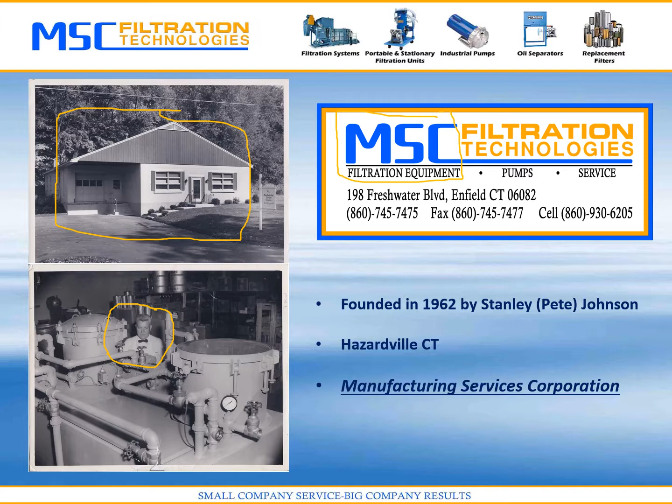Our company was founded in 1962 by Stanley Pete Johnson, and our original office was located in Hazardville, Connecticut. The original name of the company was Manufacturing Services Corporation, and that is what the MSC stands for in MSC Filtration Technologies today.

Today we're located in Enfield, Connecticut in an 8,200 square foot building where we manufacture, warehouse, sell, and engineer our products.

MSC designs, engineers, and manufactures a variety of fluid filtration and handling equipment for a variety of applications and industries. The primary industries we sell to are machine tool, lube and hydraulics, and process industries. Our products reduce waste, improve fluid cleanliness, increase equipment reliability, and improve working conditions.

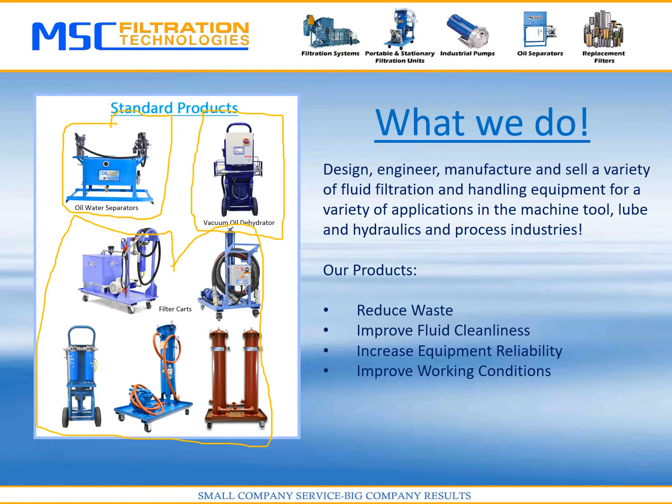On the left, you'll see some of our standard offerings, which include our FilClean line of filter carts, which can be used in a whole host of different industries and applications. Our Tramp oil separator is primarily used in the machine tool industry for removing oil from machine tool coolant. And also our Phoenix membrane vacuum oil dehydrator, which is primarily used in the lubrication and hydraulic market for removing water from contaminated oil systems, is built exclusively by MSC Filtration Technologies.

In addition to our own product lines, MSC also represents and distributes a variety of complementary fluid handling and filtration product lines, including industrial fluid chillers, fluid pumps, vacuum systems, and magnetic filters.

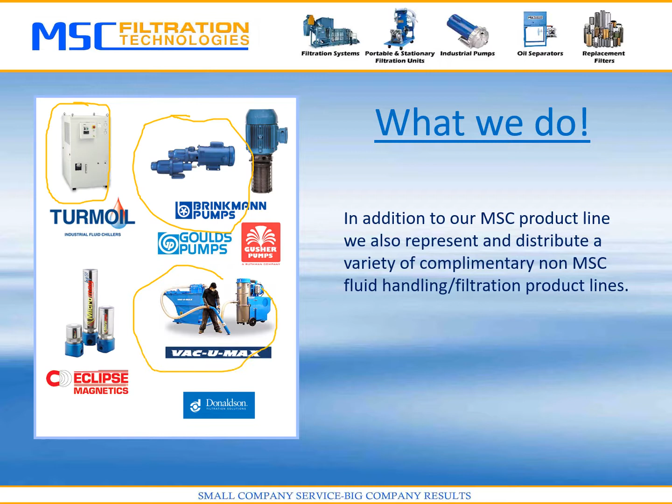With over 50 years of fluid filtration and handling experience, and because we supply and distribute other non-MSC complementary filtration and handling products, we're able to integrate the best product into one single customer-centric solution based on our customer's requirement, budget, and available footprint.

For instance, on the left, you'll see a system which is a centralized coolant filtration system for a machine shop that has multiple machines. The machines are putting out both ferric magnetic particles and also non-magnetic particles, and we have integrated a rotating drum magnetic filter where multiple machines pump their coolant into to remove ferric particles.

The coolant then goes down into a gravity bed filter for non-ferric particles and drops into a storage tank. It is then pumped back out through some fluid pumps that we also represent. So one single filtration machine for our customers versus them having to go out and get multiple different solutions for their problem.

On the bottom, you'll see another system, which is also a coolant filtration system. In this case, the customer required not only coolant that met a certain cleanliness, but also one that maintained a certain temperature. So what we did was integrate a coolant chiller, a drop-in chiller, into a tank along with some disposable filter media and coolant pumps.

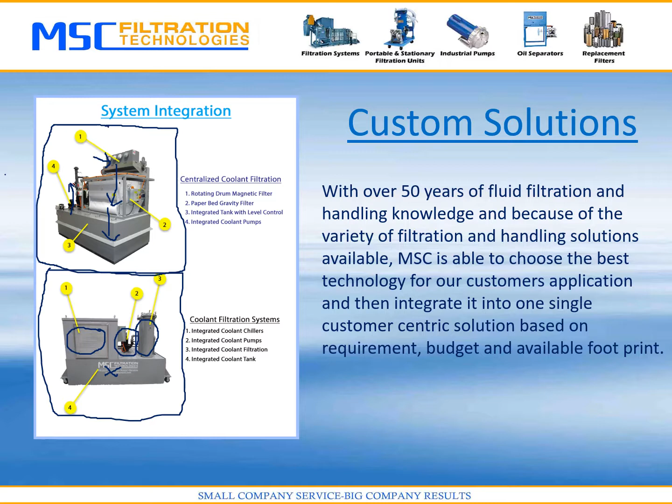This met a specific footprint for the customer where this particular filtration system can be wheeled up to a machining center. The coolant drops into it and then is pumped right back out to their machine for lubricating their tooling and also cooling their parts.

MSC's metalworking solutions are primarily sold to machine shops and machine tool manufacturers. Our primary goal on the machine tool coolant side is to keep their coolant looking like this rather than this.

The reason being is that contaminant that gets into this particular coolant, which can wash off the part or come from chips and particulate due to the machining process, can cause wear and tear on the customer's machine tool, which can be fairly expensive to replace if it breaks.

It can also affect the finish of the part and cause the customer to have to shut their machine down, and when it's not running, it's not making any money, to change coolant prematurely, which can take several hours in some cases. In addition, there's a cost of buying new coolant that might not necessarily need to be replaced if you can keep it clean.

It also affects the work environment because it can start to smell and also can cause dermatological issues for operators of the machines themselves.

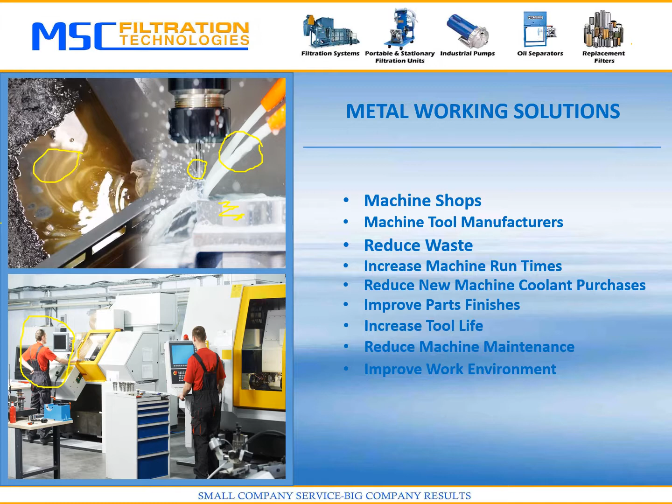MSC has a variety of ways of tackling those kinds of problems, and it basically depends on the machining type, the type of machine, the type of coolant being used. But in some cases, we can extend the life of our customers' coolants indefinitely, and they only need to replace the coolant via makeup because of losses, spills, or drag out from the parts waste.

Here is a map of a machine shop showing most of the products that MSC sells to the metalworking industry, and I'll be covering most of them in this presentation. But there's an excellent map on our website if you are ever interested in taking a look at a machine shop and trying to find the exact product and where it's typically located.

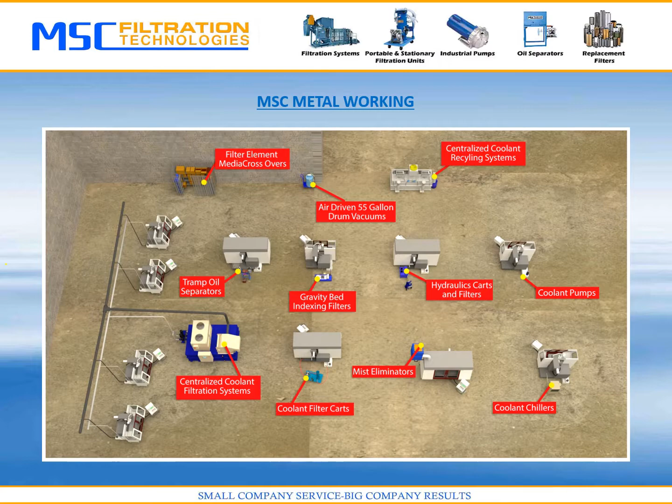So the first MSC product for metalworking solutions I'll talk about is our Tramp oil separator. Tramp oils are oils that coat metal parts. The raw metal comes in with oil on it, and when the water-based coolant is washing over it, that oil can be washed off into the coolant and build up in the whole machine coolant sump. In addition, on some older machines, they can actually have hydraulic leaks, where hydraulic oil can leak into the coolant and also build up.

Either of those types of oils, if they're not separated out of the coolant and removed, they'll build up over time, and they'll cause bacterial growth, foul-smelling odors, and dermatological issues for workers, where if they touch the coolant they can break out. It also causes short coolant life, meaning the customer will need to bring the machine down, and it can take hours to clean the machine out because they need to flush the whole coolant supply system to make sure there's no bacteria or oil left in the system.

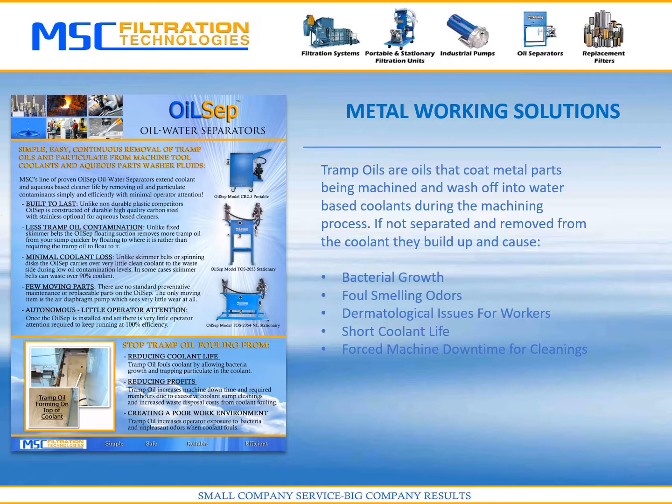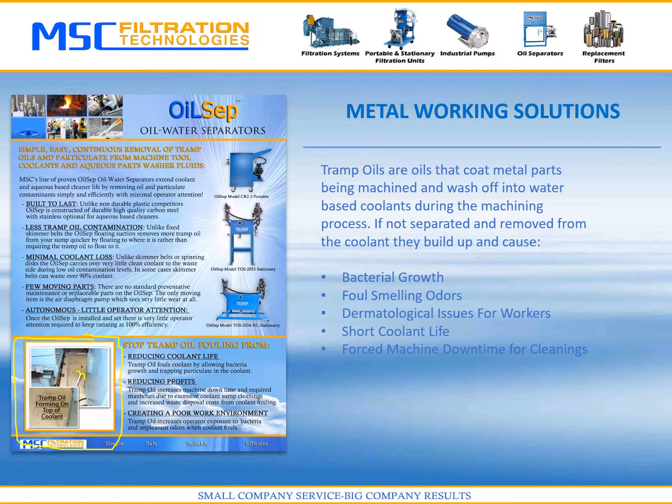So the Tramp oil separator helps prevent that. Over here on the left, you can see some Tramp oil forming on the top of the coolant, this brown material that floats to the top because the coolant is water-based. Tramp oil is oil, and oil floats to the top. That's how we separate it out and remove it from the coolant.

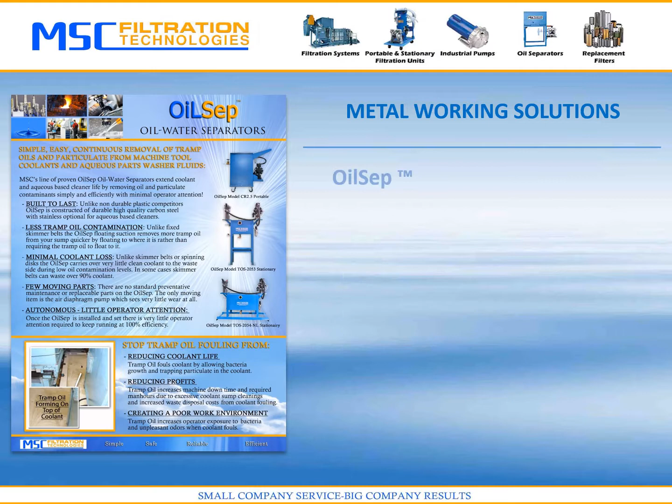Now, the oil sep has been around for a while. MSC has been building them for a long time and has thousands of these in the field. It's very simple to use, has very few moving parts, very few consumables, and very high quality, durable construction. There are more inexpensive plastic versions of these on the market, but they are not nearly as durable as the oil sep that we make.

And it works significantly better than oil skimmers for a variety of reasons. We have a very good video online on our website that will review the benefits of our technology versus the standard technology that's on the market today.

It has very little coolant carryover, meaning there's very little coolant waste associated with this. The customer throws out 90 to 95% Tramp oil, and the coolant remains on the machine. It's available in permanent installations and also portable models where it can be moved from machine to machine to remove Tramp oil that's built up. The process of separating out the Tramp oil is also very easy on the coolant—it does not affect the chemistry of the coolant at all. So you can run these indefinitely and not worry about stripping out any additives that might be in the coolant, like you might with a centrifuge or something else.

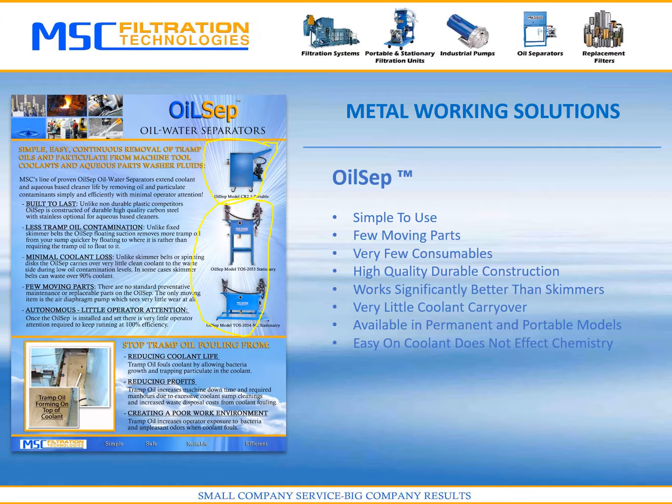So here is actually how the Tramp oil separator works. What you're looking at here is a coolant sump, a machine sump, and you can see Tramp oil starting to form on the top of the coolant. If that's left to go, it will build up a very thick layer on top of the coolant, and again start to smell and cause problems for the machine.

So we have a floating suction on the Tramp oil that has floats on it, and we pull the coolant into this floating suction into our Tramp oil separator. We're only removing the top 1 inch of coolant from the machine tool sump. The coolant is pumped into the Tramp oil separator and goes through three different stages, three different sections.

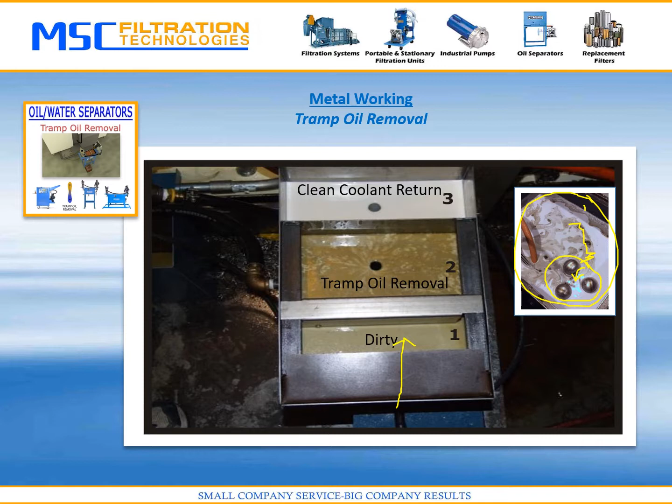Here is your dirty section, where you can see basically a blend of Tramp oil and coolant coming into our system. Then you have the separation stage, where Tramp oil is being separated out of the coolant. It floats to the top of the coolant and drops over a drain for disposal. This will actually drop off, and the customer can open that drain up and drain off the Tramp oil occasionally into a bucket or collection vessel so they can dispose of it.

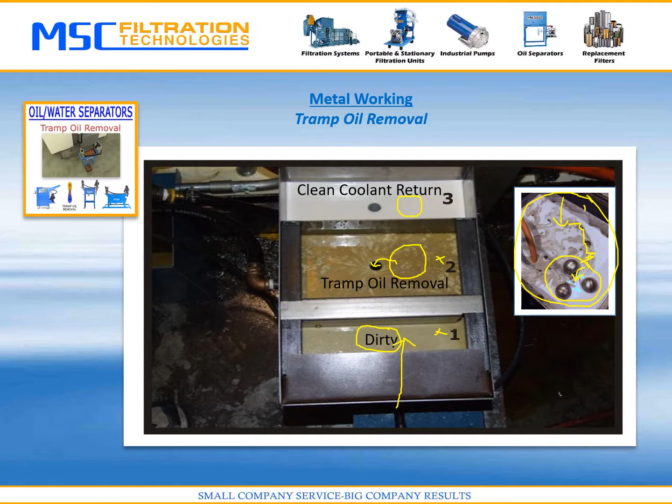And then over here is the clean coolant return side, which continually gravity feeds back to the coolant sump in a gravity fed sort of way. You can see the effectiveness of the Tramp oil separator here, where you see the dirty side, the separation side, and how clean it actually is returning back to the sump.

Here's a better picture of the Tramp oil separator and how it's typically installed and used. Over on the left, you'll see the floating suction, with Tramp oil forming on top of the coolant. The benefit of our technology is that we're continually drawing any Tramp oil that forms on top of the coolant toward that sump or suction, because it's pulling off the top 1 inch of coolant all the time.

So we don't allow any Tramp oil to really form in this sump, since it's continually being brought to the floating suction and pumped into our Tramp oil separator. Unlike, for instance, a skimmer, which sits in just one spot of the sump, where the Tramp oil has to basically float to it to get removed, so you can get a buildup of a lot of Tramp oil before it's actually removed.

In our case, we're actually pumping the Tramp oil into our system. It will go through either a fairly inexpensive disposable filter, or in this case a strainer basket to protect our pump from any chips that might get in, then through an air diaphragm pump and into our system. The air diaphragm pump has a flow control valve, and our system comes with everything needed for hookup, including air regulator, air filter, and air flow control valve for the pump.

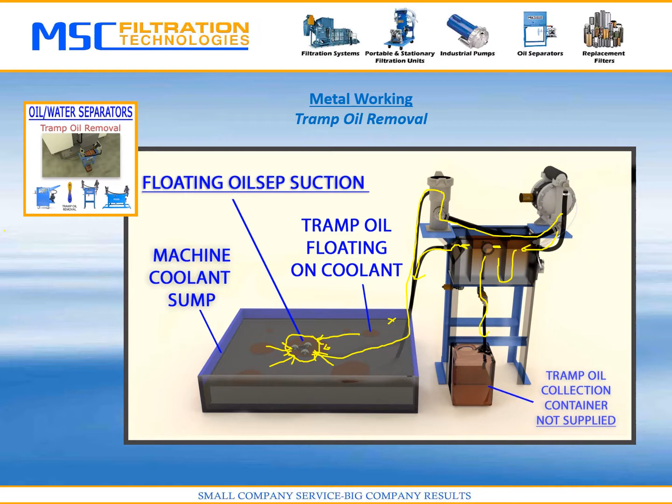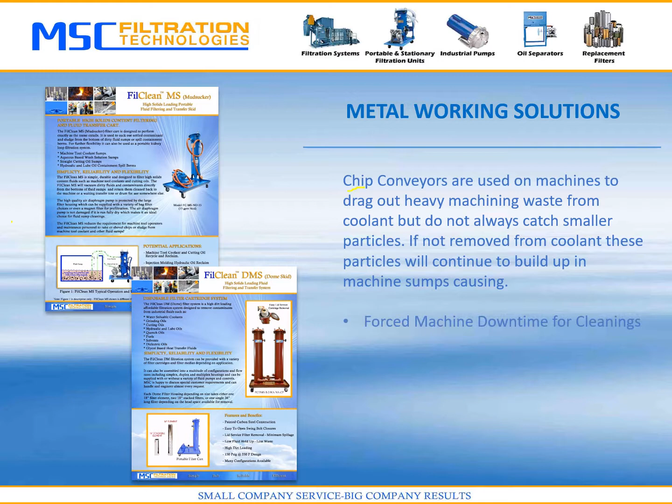The next product I'll talk about is our FilClean line of filter carts for the metalworking industry. In most cases, most machine shops have a chip conveyor that sits under the machine, where coolant and chips from the machining process fall, and the chip conveyor drags out that waste before the coolant is reintroduced down into the sump of the machine for reuse, to be pumped back out and reused in the machining process.

What happens though in a lot of cases is chip conveyors don't catch all the particulate that the machining process generates, and you end up with smaller particles of machining waste and chips falling back into the sump. Since it's continually kidney looped around the machine tool, those will eventually build up in the sump and in the coolant, which can cause a whole host of problems, from pump failures to pump clogging to poor parts finishes. As these particulates build up in the coolant, they can actually start to affect the parts finish, including shortened machine tool life.

The machine tools could potentially overheat and break because that can cause friction, and also shortened coolant life, where you get into the same situation as Tramp oil, where you have to take the machine down to throw away your coolant, buy new coolant, and clean the whole system out, which takes time.

So MSC builds a couple of different filter carts for different machining applications. One is the FilClean MS Mudsucker, which tends to be used on heavier machining applications and chips, in a lot of cases for instance aluminum, which can build up in a machine tool sump and both float and sink. What this does is you put the suction and return of this into the machine sump, and it'll stir all that contaminant up and filter it out so the coolant stays clean.

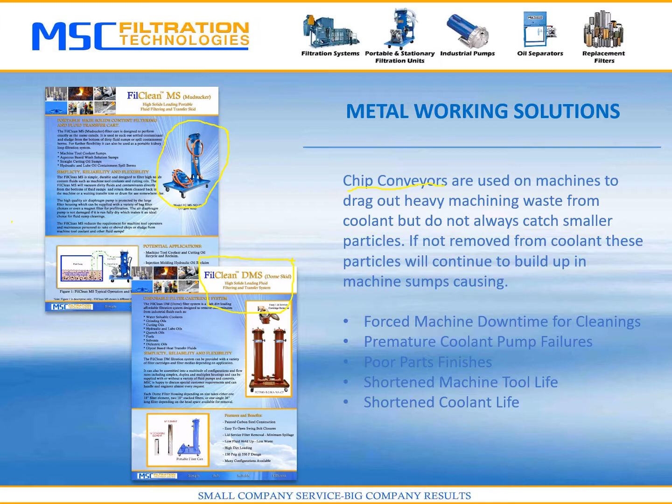The other filter cart system we make is our FilClean Dome, or DMS skid, which is primarily made for grinding applications. It works very similarly, where you would put the suction and return hose into the sump of the machine, but grinding applications tend to produce much finer particles than heavy machining applications. In this case, we use our Dome cartridge filters, where we pump the oil through these cartridges to keep the machine tool coolant clean.

Over time, aluminum can tend to float on top of the coolant, and it also sinks to the bottom of the sumps. Because of that, as it builds up, it can start to cause problems with coolant pumps because they can start to plug, or the coolant distribution can start to plug hoses, and also again start to affect the parts finish of the machining process.

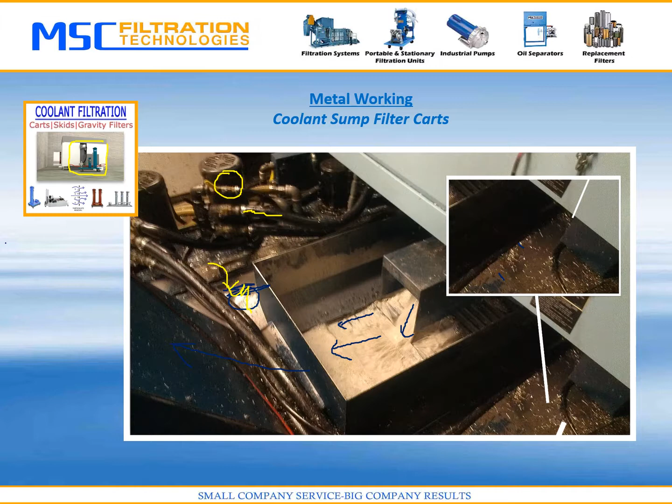That is what the FilClean MS Mudsucker and the FilClean Dome are, except the Dome does that primarily for grinding applications versus machining applications.

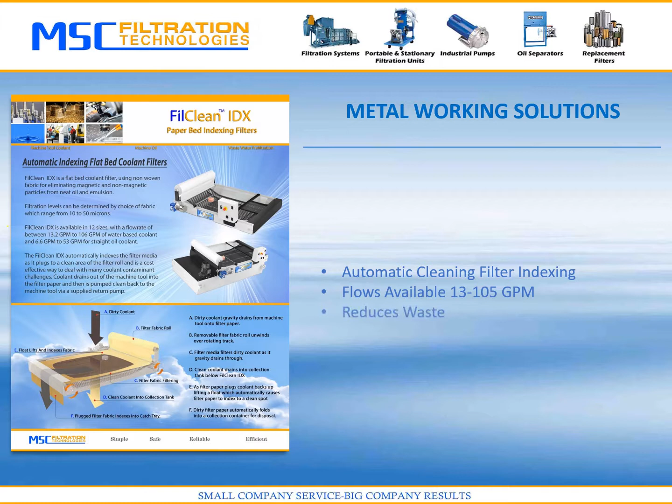The next product I'll talk about is our FilClean IDX, which is a gravity-fed indexing filter. This would be used on a machining process primarily where there are a lot of contaminants, and disposable filtration isn't really an option.

The way these work is you have a roll of filter media here, and the coolant gravity feeds out of the machine into the IDX. As it goes down across the filter media, your particulate builds up, and as it builds up on this filter media, your coolant starts to back up as it gets restricted.

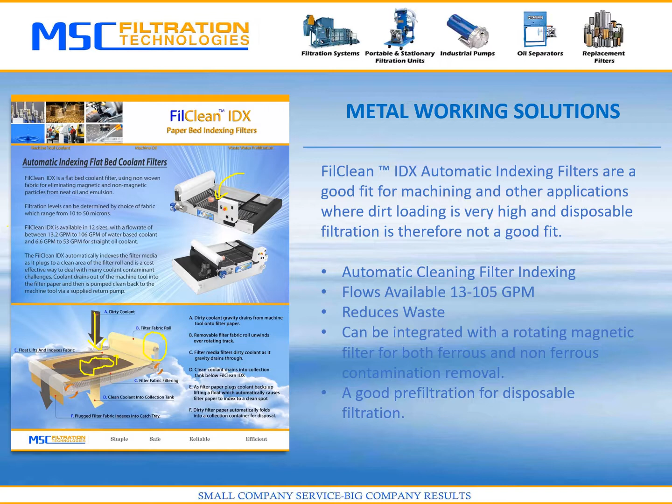When it backs up, there's a float or some electrical probes that the coolant will contact and lift. When it does, your roll media will then index off the machine into a container, to a clean spot, and it will just continue to do that.

The benefits of this technology, which has been around a while, is that roll media is very inexpensive, and you end up with an automatic compressed pack of filter media and machined waste that is in a sump that's easy to dispose of.

This can be used on both grinding and regular machine applications, basically set next to a coolant sump with the material sent back to the sump. Flows are available 13 to 105 gallons per minute, and it significantly reduces waste.

We can also install a rotating magnetic filter. It's not actually shown here, but the coolant comes in and goes through a rotating drum magnetic filter to remove iron particles first, and that comes out as a dry cake.

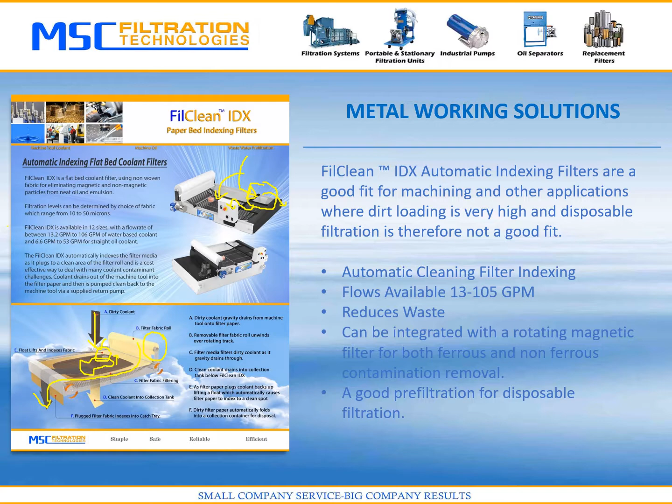Then the regular coolant goes down into the paper bed filter for final polishing. So it can be incorporated with a grinder, a magnetic filter, and a paper bed filter, and is very economical to operate once it's installed.

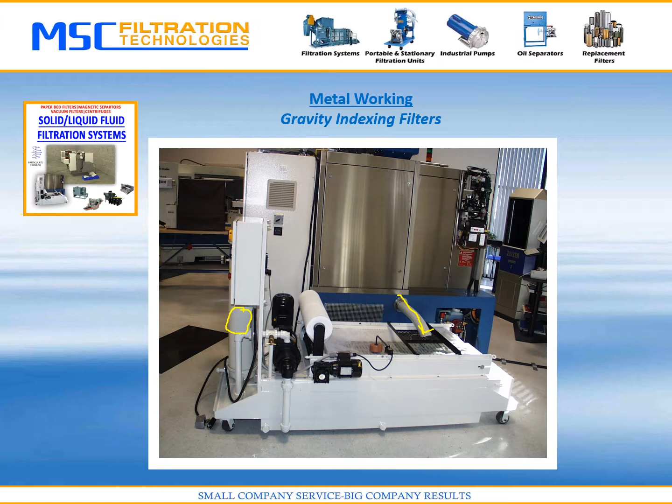And the next product is our FilClean CR Coolant Recycling line. We are able to actually, with our coolant recyclers, in many cases, extend the life of our customers' coolants indefinitely.

The way we work with our customers as far as recycling their coolant so that it can be reused indefinitely is we partner with them. It's not just a matter of selling equipment. It's also working with them to maintain correct chemistry while they're recycling and taking care of their coolant correctly. So we tend to think of this as a partnership between us, the management at the facility that wants to recycle, and also the customer's coolant supplier, who would all need to be involved for a good, effective recycling program.

We make both a 3-tank recycler design, which could handle up to about 1,200 gallons of coolant per day, and for smaller shops, a smaller 2-tank recycler.

There's an excellent video on our website about the whole recycling process, how it works, what we recommend. That is excellent for anybody who wants to learn about the process. It's about 13 minutes long, but it's fairly in depth as to how the whole process works.

In the right situation, it's got a very amazing return on investment, in some cases 6 months. It's not very difficult to do, so it's a fairly simple operation. And again, it provides all the same benefits of keeping your coolant clean, reduced machine tool downtime, reduced environmental footprint, increased tool life, improved parts finishes, and of course improved work environment. So there are a lot of benefits to recycling coolant on site.

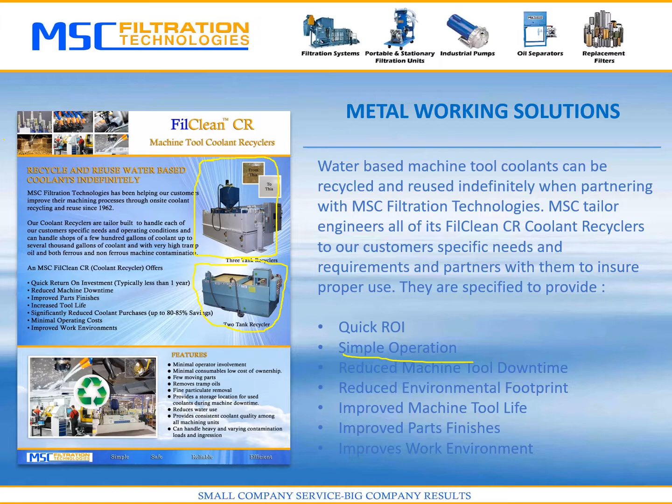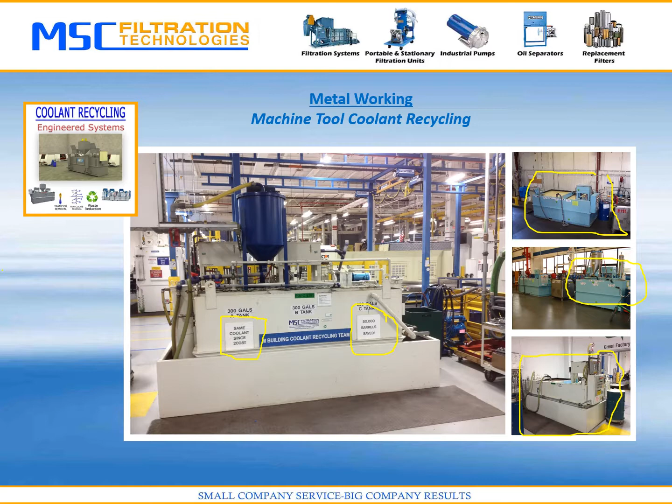You'll see our 2-tank recyclers, 3-tank recyclers here, and also another 2-tank recycler in the smaller shop. Again, we have a very good video online to go over the whole process, which I would recommend you take a look at if you're interested in learning more about recycling itself.

So the last area I wanted to discuss regarding our metalworking solutions, coolant filtration and handling products, is our custom coolant filtration and handling systems, which I discussed a little bit earlier on in this presentation. These systems are designed around what our customers' material are being machined, number of machines they have that they want to filter, contaminant size and type, the amount of coolant they are actually using, the coolant type, and also the machining type. Are they machining heavy material, or are they doing some sort of grinding?

And what we're able to do again is integrate several technologies into one solution for the coolant filtration and handling application. For instance, up top here, what you see is a centralized coolant filtration system for grinding applications, where there are actually 6 different grinders in this machine shop. Each one of them will pump their coolant into this machine across a rotating drum magnetic filter to remove grinding fines from the coolant.

So what happens is the coolant from each grinding machine is pumped down across this rotating drum magnetic filter that indexes. The ferric particles are attached to the drum, and as it rotates, the material builds up a cake and is scraped off and drops down into containers for disposal or recycling. Then in the back are coolant pumps that will return the coolant to each machine. So this does everything, filtering and pumping the coolant to each specific machine.

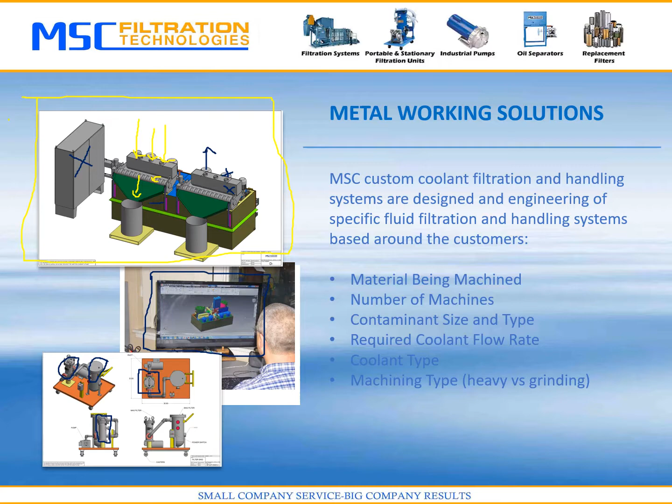So here are a couple of systems in our custom coolant filtration area. When I talk about custom coolant filtration, it can be one single filtration system for a specific machine tool, or a centralized system for multiple machines, like up here in this photo, where you've got multiple machining centers all feeding into one pipe that sends their coolant over into our machine.

The material is filtered and chilled to a certain temperature and then pumped back to each machine through a separate pipe header that you see up here. So in many cases, we can design an entire filtration system for one machine shop or multiple machines, or a single filtration system for one specific machine that might be having some issues.

Here's an example of the system I discussed, where you've got a large gravity bed filter that the coolant from each machining center is gravity fed down into. It goes through the paper filtration media. When this filter media is plugged, it automatically indexes out into a container for waste disposal. The coolant then gravity feeds down into this tank and is chilled to a certain temperature by this particular drop-in chiller, then pumped back out into the machining centers in a continuous manner.

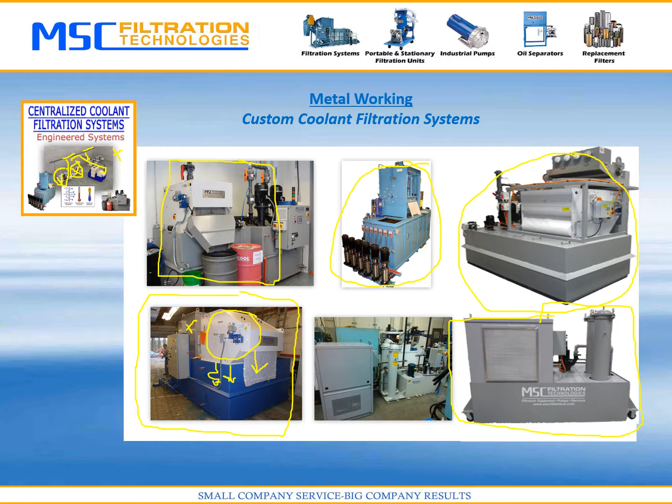Here's the single machine system for the specific grinding machine I talked about earlier. And here's another system we designed specifically for a machine tool application to keep their particular coolant clean.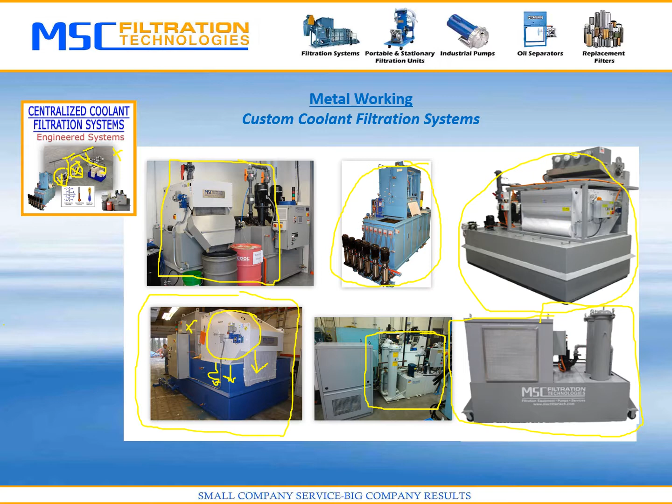So if you don't see exactly what you're looking for on our website, you can just ask the customer what they're trying to achieve, and in most cases we can come up with a solution for them.

Now I'll get into our lubrication and hydraulic solutions, which cover a whole variety of different industries. We've sold to paper, power, chemical, mining, marine, on and offshore oil rigs, refineries, and road machinery. The primary focus is filtration and keeping lubrication, hydraulic systems, and gearboxes reliable by keeping their lubrication clean. The cleaner you keep lubrication, the longer you'll keep your bearings, gears, and hydraulic systems from failing, and that's our main goal here.

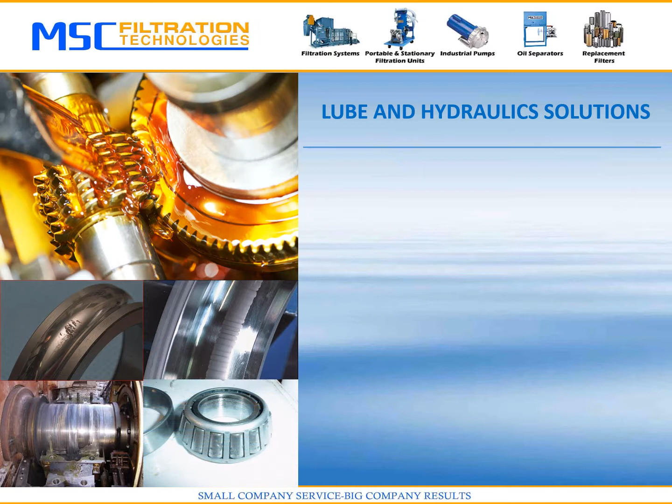Over here on the left, you'll see some damage caused by lubricating oil—here's a bearing that has been damaged by particulate over time. We have a pretty good video online called Water and Particulate in Lubrication and Hydraulic Oil, What's All the Fuss About, which goes into the types of damage that particulate and water contamination in lubricating oil can cause these systems. It's fairly in depth, about 14 minutes long, but it'll make you an expert on lubricating oil and why it needs to be kept as clean and dry as possible.

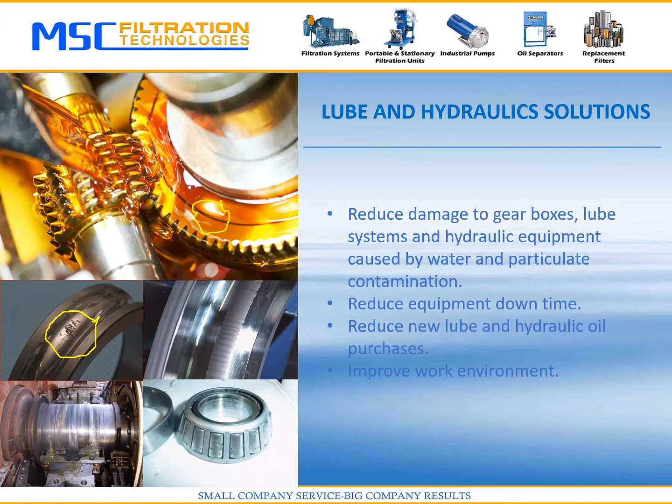So our job is to reduce the damage to gearboxes, lube systems, and hydraulic equipment caused by water and particulate contamination, reduce equipment downtime, reduce the purchase of new lube and hydraulic oil, and improve the work environment of our customers. And we have a couple of unique products to do that.

So the first product I'll talk about in our lube and hydraulic solution line is our Phoenix membrane vacuum oil dehydrator and purifier, which is the world's very first commercialized portable membrane oil vacuum dehydrator that's been put on the market. It's exclusively built by MSC Filtration Technologies, so it sets us apart from a lot of companies on the market as far as oil dehydration for lube and hydraulics.

What it does is it removes 100% free water, 100% emulsified water, and dissolved water from contaminated gearboxes and other lube and hydraulic oil reservoirs.

These systems can get contaminated with not just particulate, but also water from things like cooler leaks. A lot of customers use water coolers to cool the oil because it generates heat, and sometimes those leak, or sometimes water gets in just from the atmosphere, or sometimes in lubrication systems there are steam seals between the bearings, and steam can get through the bearing into the lubricating oil. So water can actually ingress into these lube and hydraulic systems from a variety of different areas and cause quite a few problems for the customers.

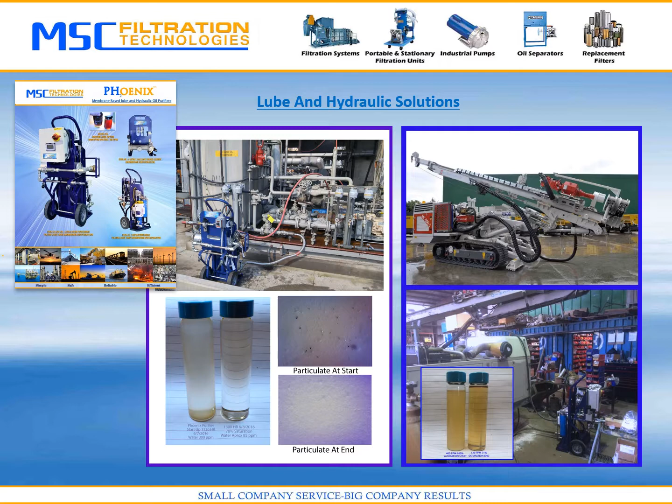So here you're actually seeing the Phoenix in the field on two applications. One here is actually at a refinery. This is our 4-gallon per minute hazardous duty Phoenix. What it's doing is filtering lubricating oil in a 700-gallon oil reservoir over here. This oil reservoir is supplying lubricating oil to the bearing of a gas compressor.

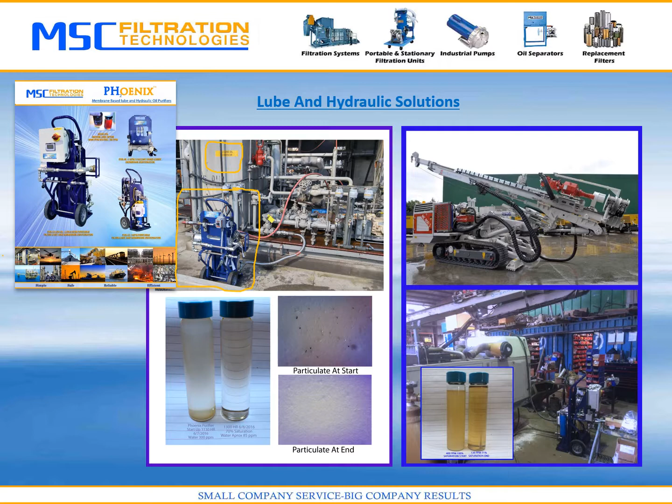What has happened is the customer has gotten a seal leak where they had moisture get in through one of the seals into this oil reservoir and contaminate it. If it wasn't taken care of, they would either have to throw away 700 gallons of oil, which is costly, so dispose of it and buy new oil, or live with the problem and end up with a bearing failure eventually, and then a piece of very critical equipment at the refinery that would not be working and would require a repair. So we put this on, and it basically is kidney looping oil, bringing oil out of this reservoir and pumping it back in.

This is what the oil looked like when we started, and this is what the particulate looks like when we started - it was fairly dirty. When we had it hooked up for about a day or two, this is what the oil looked like after we were done, and this is what the particulate looked like after we were done. So they basically put this on, let it run, and we saved 700 gallons of oil.

Over here is a different application, and this is a drilling rig at a rental company that rents road construction equipment. This is a drilling rig for pylons - it drills holes for driving pylons into the ground.

What happened here is our customer rented it to their customer, the rig here, and a brick got accidentally dropped onto the top of their oil reservoir, their main oil reservoir. It's about 150 gallons here, and cracked it. As it sat outside and the customer was using it, rainwater got into this hydraulic reservoir and contaminated it.

And the big problem with that is, if you see all these pistons here, and pistons here and pistons here, they are all fed from this hydraulic oil reservoir. So all that water, that hot, poor quality oil and water, got pumped throughout all these systems and hoses and all throughout the machine.

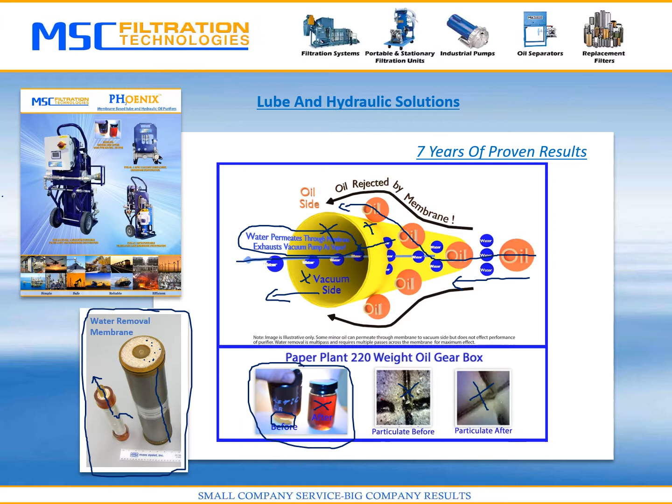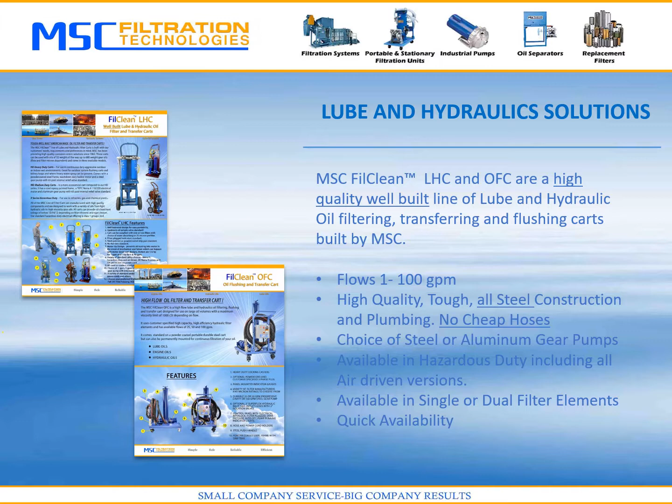The next product line I'll discuss is our line of lube and hydraulic oil filtering carts, which are primarily used to transfer, filter, or kidney loop oil out of equipment such as gearboxes or other lube and hydraulic systems.

We make two different models. One is our LHC model, which is our two-wheeled cart, available in 1, 5, and 10 gallons per minute. You can get one or two filters with this cart—for instance, a water absorbing filter followed by a particulate filter, or a larger micron pre-filter followed by a tighter particulate filter.

These are very well-built carts. There are a lot of inexpensive, cheaper carts on the market. We build a cart meant for areas where they're going to get banged around, moved around—service companies that take the carts outside, use them in driving rain or other tough areas, and paper plants where there's a lot of moisture or just a lot of rough handling.

The plumbing of the cart is all steel. You'll find other carts out there that have plastic tubing as supply tubing to the filters, or hoses of some sort. Ours are all hard piped. Every cart has filter plugged indicators and upstream oil sample valves.

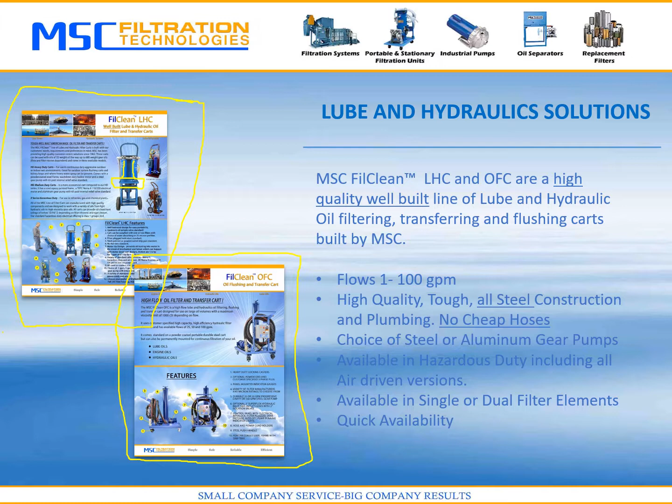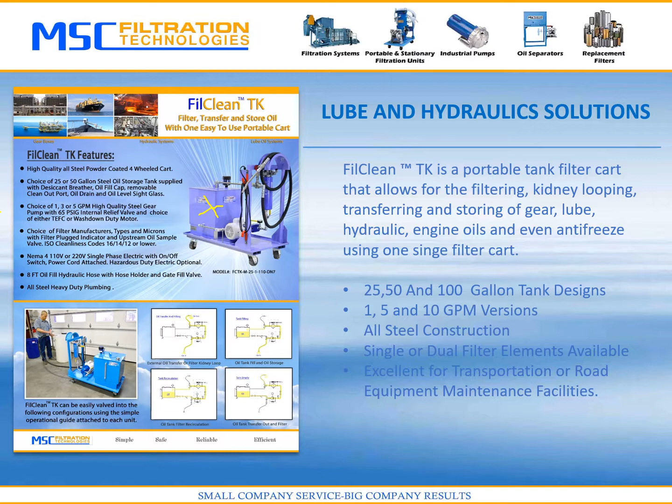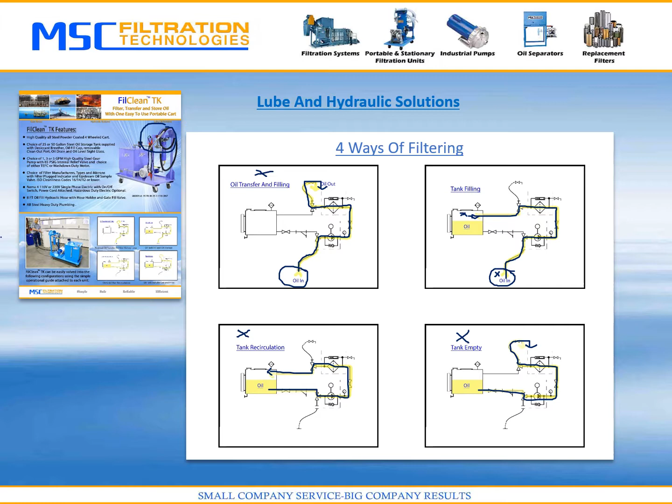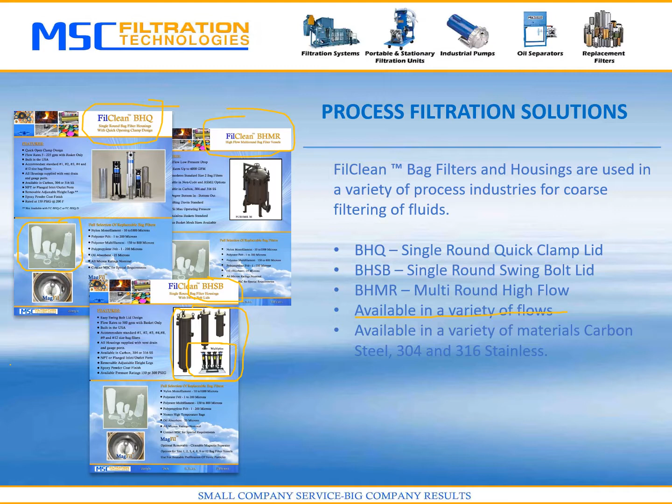But we have the option for either. They are all available in a variety of flows and materials of construction, including carbon steel, 304 and 316 stainless steel. Some are customizable as well, as far as connections, fittings, and different sizes. So if your customer needs a specific fit up, talk to us and we can certainly do that. We can also put these in parallel, like in this system, providing manifolded bag housings with isolation valves so customers can change their bag filters while running their processes.

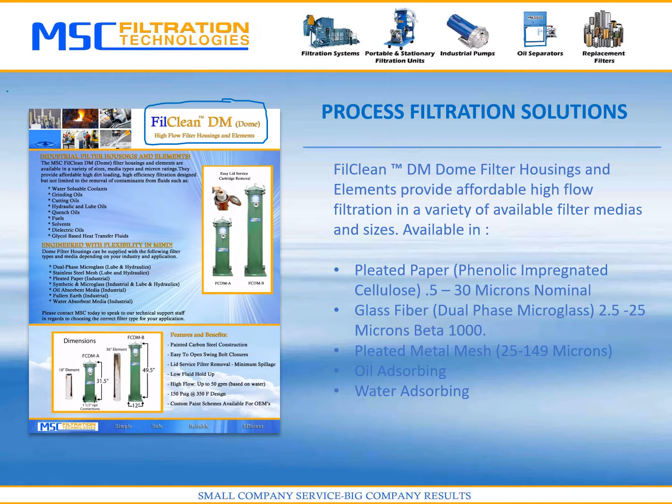So again, an awful lot to talk about, but MSC is a shop dedicated to finding and engineering the correct solution for the customer. We can usually do these things fairly quickly and without a lot of hassle for the customer. So if they're looking for something in particular, we have an awful lot of experience to guide you or your customer towards the correct technology for it.

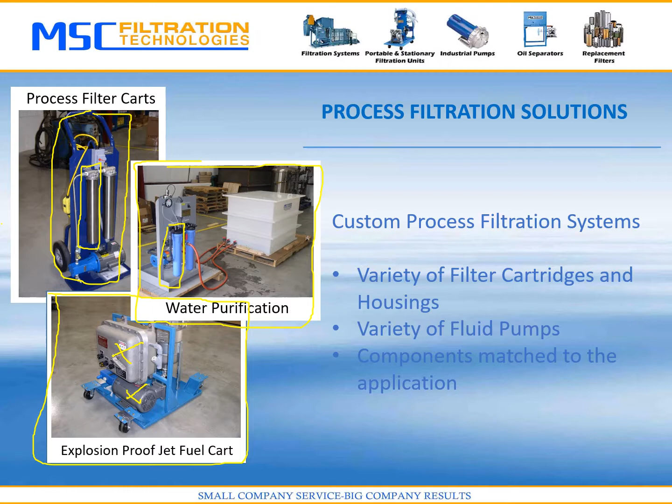So we've come to the end of this video. Thank you for watching. I have covered the three industries that we primarily serve, and most of our products, but not all.